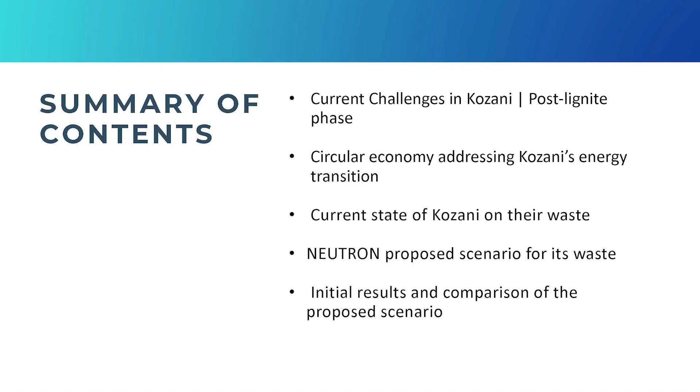So what we will be seeing in the presentation is what are the current challenges of Kozani for the post-lignite phase. We're going to see how circular economy can address these challenges, and not only that, but by solving another issue that there is in the city and of course in the area, and not only in Kozani, in a lot of areas of Greece, how we can address Kozani's energy transition.

Also, when we're talking about circularity and circular economy, we mainly talk about waste, how we can utilize it, how we can bring back the waste, so what is being thrown out, and make it valuable for us and for the project. So we will assess the current state of Kozani, of its organic waste, and of course showcase the scenario that we proposed in Neutron.

Okay, so what is currently going on in Kozani? We've seen some issues for its district heating system. We have an increased cost, translated into the citizens. So citizens were forced to pay more in the district heating systems. They don't have any other solution because they're connected to the district heating system.

For the ones that cannot maybe read the image below, or maybe don't know Greek, I will try to translate. It's from the questionnaire that we gave out in the municipality of Kozani, and almost 60% and higher of the citizens that participated in the questionnaire said that they had to reduce the operation of the district heating system in their house due to the heating cost increase. This is something that we cannot take lightly, of course.

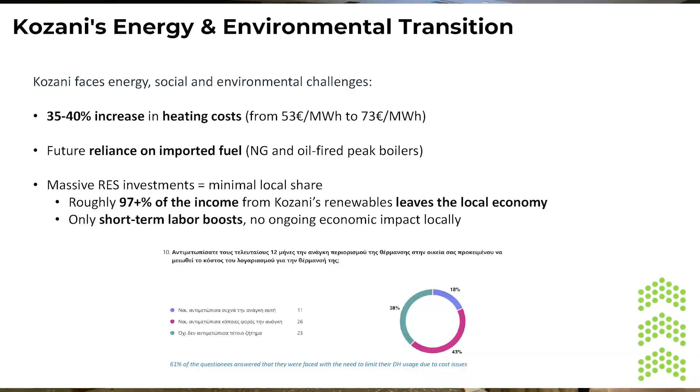And another thing is the lack of social growth that we have during RES investments in the local area. So when we have an income coming in for the RES investments, we have a minimal percentage of it going back to the citizens, going back to the local economy. And of course, the short-term labor job vacancies that provide, let's say, fake socioeconomic growth. And when this bubble breaks, there is a lack of job vacancies in the area.

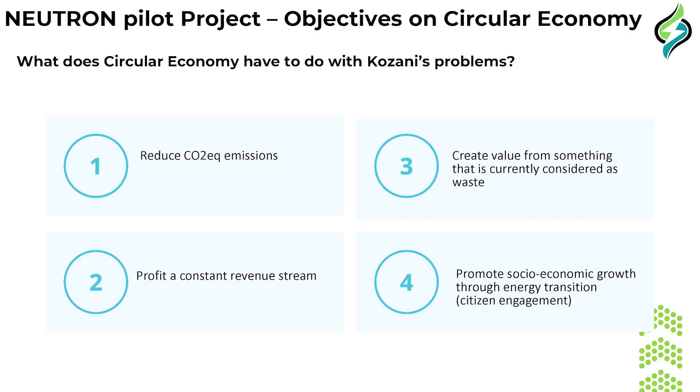So moving on. What role does the circular economy play in the issues that we addressed earlier, in the Kozani problems? With the circular economy concept that we'll present in the next slides, we plan to, of course, reduce the CO2 equivalent emissions, because we don't only have CO2 emissions. When we talk about waste, we talk about methane emissions. Methane has a higher emission factor than CO2.

We talk about creating a profit, a constant revenue stream for the local entities, for the local citizens. We talk about promoting socioeconomic growth, and of course, creating value from something that is currently not being utilized. So this is the waste. Moving on.

So what we try and achieve through the concept is solving one problem that currently exists, but not a lot of people are talking about, which is the unutilization of the organic waste. When we have waste that is not being utilized, so it's being thrown into the landfills, for example, we have high emissions that are being produced. Of course, we have costs for this waste: when we transport this waste into the landfills, this is a cost. This is a high percentage cost.

So we're talking about creating a solution to this problem and in parallel solving Kozani's energy transition problems. So the current state that we were given by the local partners of Neutron is that on the one hand, as we said, we have unvalorized, unutilized organic waste. We received input from local entities, from the ADIMA and the IAC, about the quantities that are currently not being utilized. This comes from agricultural waste, so cow, goat and sheep manure, to wheat straw.

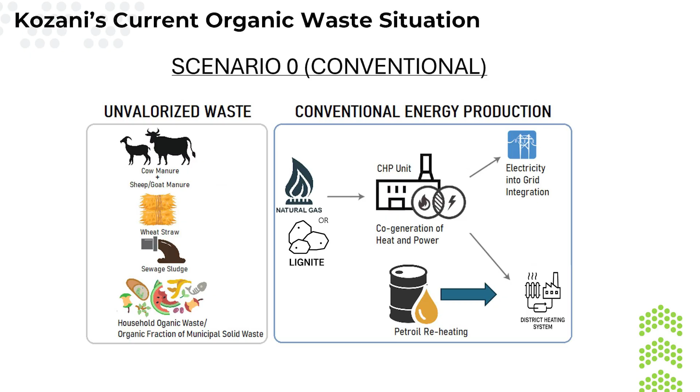Another waste stream is the sewage sludge, which to our knowledge is being utilized for compost, but not by the AIAC, so not by the entity that produces or actually manages the waste. What is currently being done is they have some contractor utilizing the sewage sludge for compost. And of course, we have the organic fraction of municipal solid waste. This is what is supposed to be thrown out into what we call the brown bins. For those of you who don't know, the brown bins are the ones used for the organic fraction of the municipal waste.

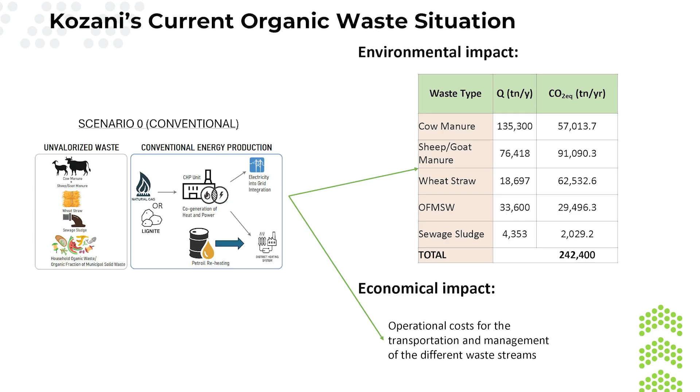And to the left, actually, what we can see is the conventional energy generation. So we currently have lignite phasing out, transferring into natural gas for our district heating coverage, and of course some peak boilers fed through oil. So what's the impact of this? For the unvalorized waste, we calculated the CO2 equivalent emissions. The reason I'm saying equivalent is because it's the methane produced from the waste just sitting and not being utilized. And of course, the economic impact: as I said earlier, we have an OPEX due to this waste being transferred and managed somewhere. So, next page.

Going from the current state, what we assessed in Neutron is putting the waste quantities that we identified into an anaerobic digester, so producing biogas, and burning this biogas in the thermodynamic cycle of the green heat module that we presented earlier, to produce heat for the city of Kozani and of course electricity, on which we can gain some profit.

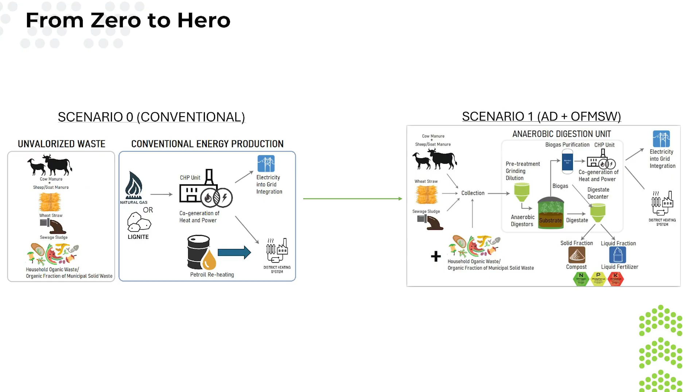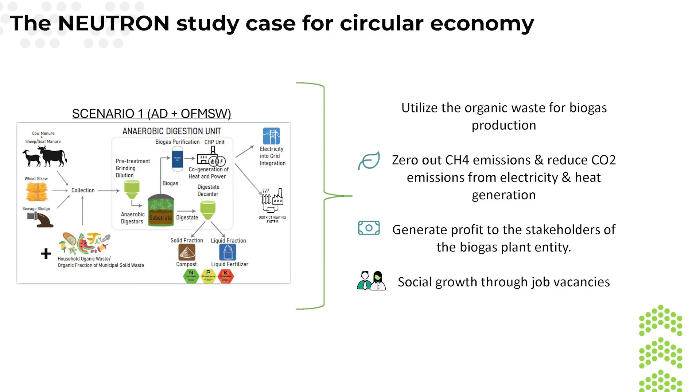What's the benefit of what we propose? Of course, it's the utilization of the organic waste, so not defining the organic waste as waste, but actually as a source, to zero out the methane emissions and save some CO2 emissions from the generated electricity and thermal energy. Of course, it generates some profit for the stakeholders that will create the biogas entity, and some social growth inside the city of Kozani, creating some job opportunities for the city.

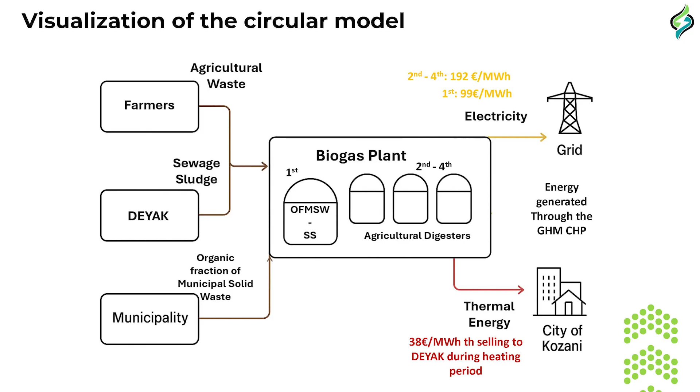Also in our analysis, we assessed a constant value of 38 euros per megawatt hour for the thermal energy being sold into the district heating from the CHP of the green heat module, on which the biogas will go in and feed the district heating and the electricity grid. Okay, so I just wanted to very shortly present the sizing that we did.

So in the technical parameters of the biogas plant, we calculated all the technical equipment needed. We found some CapEx value for it, some operational value for the equipment. We calculated the initial investment costs: civil engineering costs, the connection to the grid costs, of course the salaries that we would need for the biogas plant to operate, the energy needs for the biogas plant, so electrical and thermal needs, and of course the transportation costs. I would like to stay on the transportation costs because this is a cost that already exists.

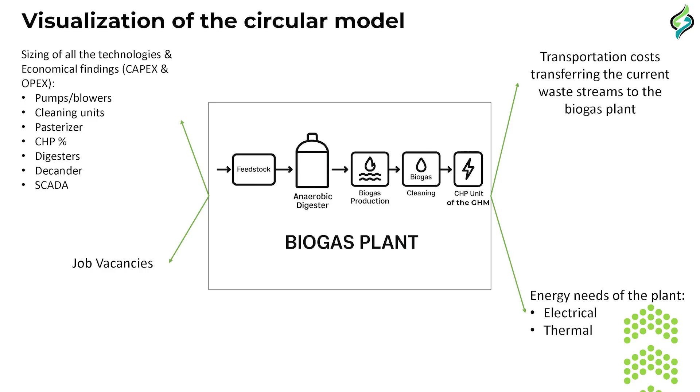So we plan on taking these costs out of the current stakeholders, so the municipality, DEYAK, and the farmers. This is one of the benefits that the stakeholders will have in order for them to give the waste into the biogas entity. They currently have some costs that would go to zero, and the transportation costs would transfer into the biogas entity.

So as a general outlook, we look at on average around 15 million cubic meters of methane produced per year. This accounts for around 40 gigawatt hours of electric energy and 40 gigawatt hours of thermal energy. As we saw, based on the constant values earlier, we had around 10 million, so the joint ownership that we assessed would have the form of an energy community.

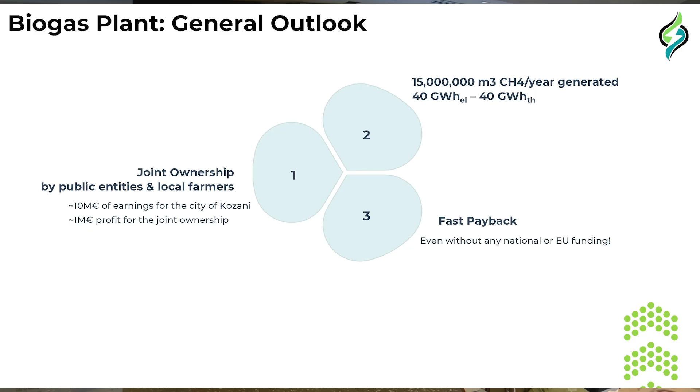This means that only 10% of the income can go into the profit of the stakeholders. The other 90% could be utilized in the city of Kozani in some way. So we're talking about around 10 million euros per year in earnings for the city of Kozani, and the way we can utilize this we can see in future presentations, and 1 million profit for the stakeholders, so the farmers, DEYAK, and the municipality. Based on this, we concluded a quite fast payback period, lower than 10 years, without any national or EU funding.

So in a nutshell, in the current state, the 3 stakeholders that we identified have transportation and management costs for the waste. We have environmental impact, so CO2 equivalent emissions being produced. In the proposed scenario, we zero out the operational costs for the stakeholders, and of course we add that 10% profit for them. For the environmental scenario, we zero out the CH4, so the methane emissions. And we have added benefits from the energy generated, electricity and thermal energy.

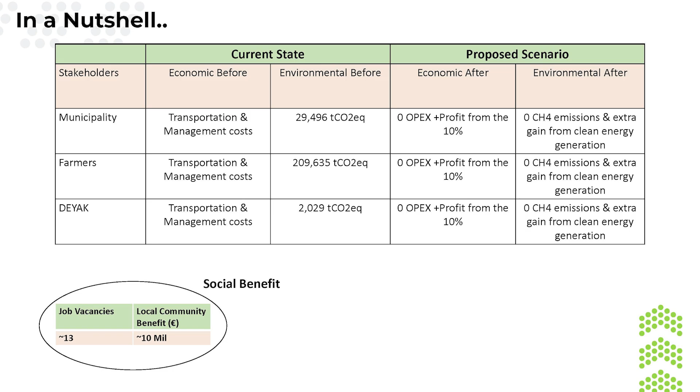And of course, the important thing here is the social benefit, which we calculated to be around 13 jobs created for the biogas plant, and of course the around 10 million euros per year that could be utilized by the city of Kozani.

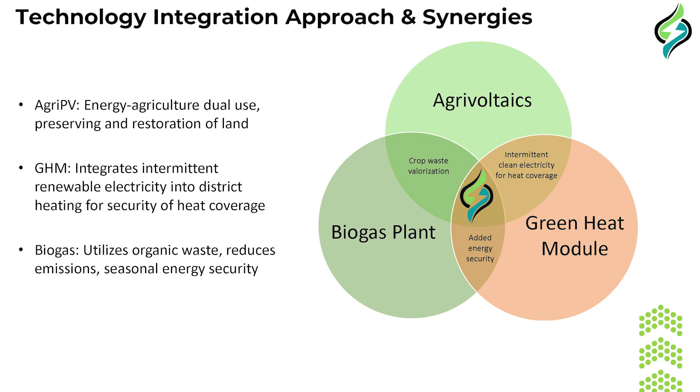So closing, what I want to say is the amounts of energy that we showcased for the biogas plant are minimal compared to the demand of the district heating, compared to the electric needs of DEYAK or the city of Kozani. This is why this is just one out of the many solutions that Neutron assesses, has calculated, and tries to synergize in order to achieve a complete energy transition. This is it, I think.